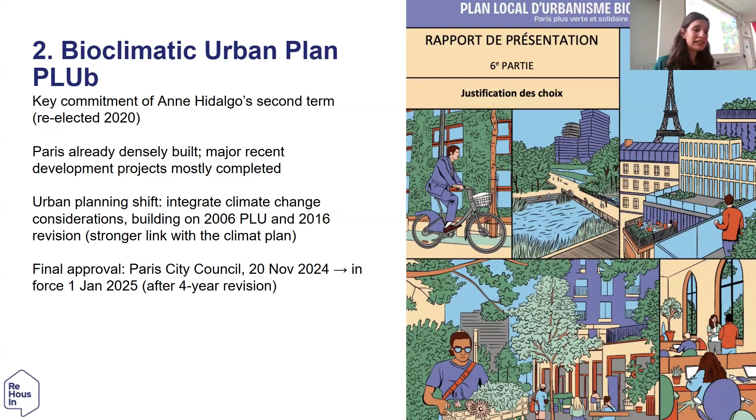What is interesting is the focus of this bioclimatic plan. There are many aspects, but what we are focusing on here is the existing environment and how we can adapt the existing built environment to climate change. So how to do that? The bioclimatic urban plan requires the integration of energy saving measures every time works on existing buildings are carried out.

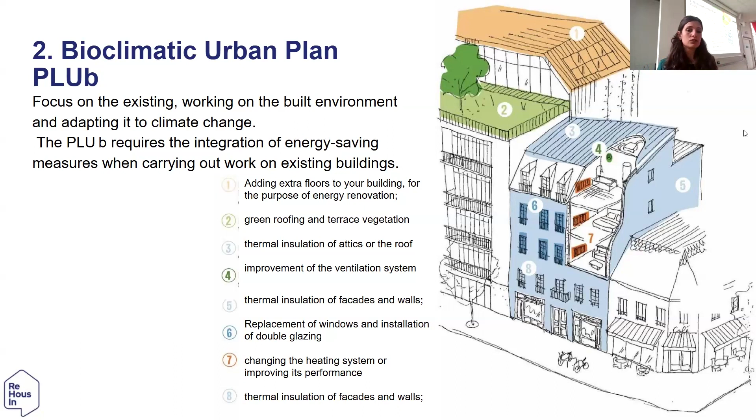So just to go to housing retrofitting and then move forward to the case studies we're going to focus on. In Paris, more than half of main homes, so first residences, are in the least energy efficient categories, which is much higher compared to the regional and national averages. Most of these inefficient homes are private, about 58%, and they tend to be concentrated in central and northeastern neighborhoods.

In 2021, a national law started gradually banning the rental of the least energy efficient homes. Since then, the rental market, both private and social, has been under increasing pressure, even if some exceptions are allowed under this law. Finally, we should also focus on some households that might be more vulnerable compared to others in the city. In fact, small-scale owners in northern districts, such as the 19th or the 18th, face high retrofit costs compared to their incomes.

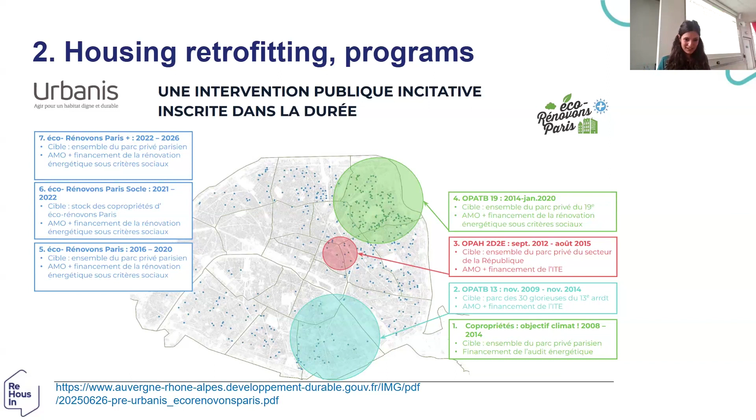So after having given you some insights about the context, housing policies, and greening and housing retrofitting policies in Paris, we can now move forward to the specific case studies, and I will let Antoine present it. Thanks, Federica. I can take it from now on.

So that was already, I guess, a lot for you to get your hands on, and perhaps it was also a bit abstract because you're no expert in housing issues or retrofitting, which might be a bit technical. But I hope that you have already got some idea of the social issues which are at play. If I were to sum up the social issues we're dealing with, it's basically that, yes, there is a need to have greener cities, but who's going to be able to live in these cities? This is the core question we're looking at in this research and in these lectures.

Who decides who lives in greener cities, and who can access greener housing? Because housing retrofit costs a lot of money, since we have to upgrade the building envelope, technicalities, systems, and so on. And so some landlords might be tempted to say, hey, I've invested in housing to have some rents every month in my pocket. So, okay, I can invest, so the living conditions for the renters are better, but I also need to recoup my investment. So why wouldn't I increase the rents?

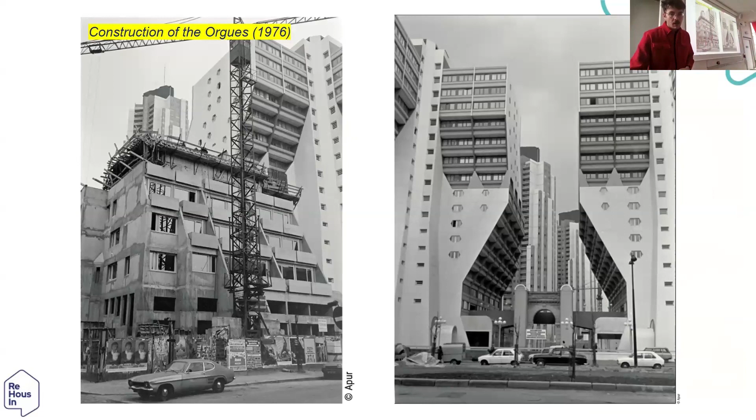As a result, there are very pressing environmental issues because building density is a major factor of urban heat islands. What are urban heat islands? It's basically the idea that during the day, the built environment sucks up the heat and then gives back the heat during the night, so that although the night air might be cooler, it's not really, because then it gives you back the heat, and I'm sure that you've experienced that yourself, probably.

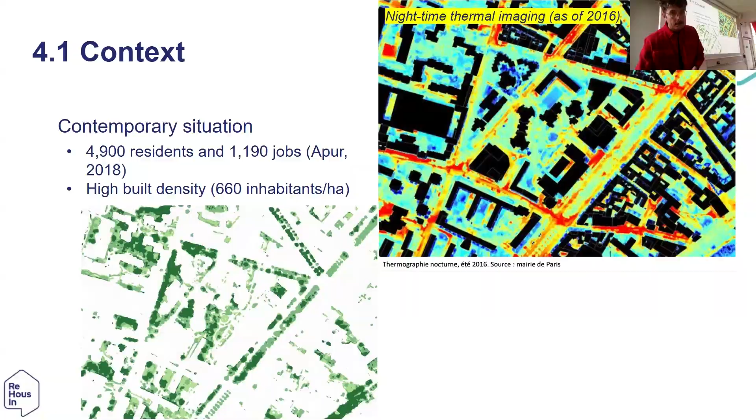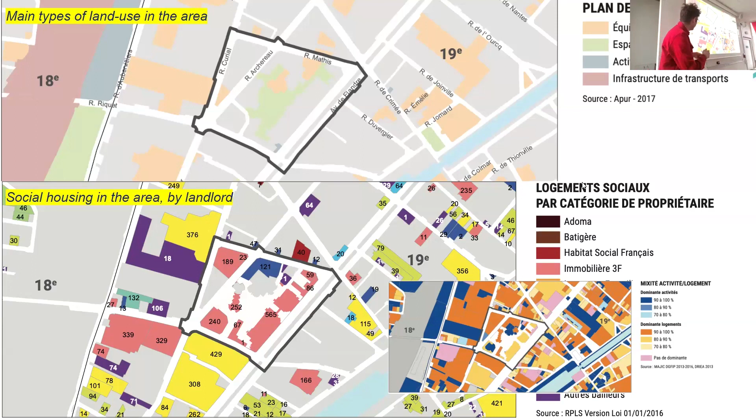This is also an area (the map shouldn't be here, but whatever) that is characterized, as you can see, by a very important presence of social housing. So all of these color blocks are social housing. The 19th district is one of the districts in Paris with the highest share of social housing. And we'll bear in mind, of course, that this is social housing, but then we need to think about what kind of social housing.

This is also an area, if we look at some of the issues, that is facing very pressing social issues. First, there is the phenomenon of population aging. It's an area where a lot of the residents, more than a third, have lived there for two decades, which implicitly means that there may be some turnover in the population due to mortality.

Second of all, there are a lot of economic difficulties. If we take a number of indicators, the neighborhood doesn't fare very well compared to the 19th district or to Paris as a whole. For example, its poverty level is above that of the district or of Paris. That's the same for unemployment. Here you can see the increase in the number of job seekers. There's been some wage growth, but less than in the district and in Paris. So again, very pressing social issues, with a part of the population experiencing dire living conditions.

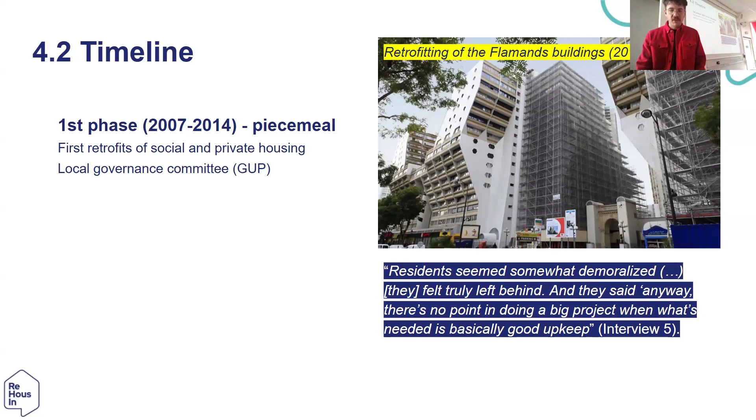They felt truly left behind, and they say, anyway, there is no point in doing a big project when what's needed is basically good upkeep. So the mood by that time was that first we need to fix the basic things, and then maybe we will do something bigger. This came during a second phase, during which the city basically got some money from the state and engaged in designing a master plan, which basically laid out different major orientations for the complex.

To sum up, they did a lot of things, but the major decisions were that they basically should try to open up the complex because it was seen by some residents, but also by different actors who participated in the workshops, such as the police and the planners, as too closed. So they needed to open it and to make it more attractive to passersby and to residents of the neighborhood. And this is how they justified the demolition of 12 housing units here to make this sort of walking path, to make the area more welcoming.

As they say, they did other things. They wanted to enlarge the existing garden, to redesign the garden. So I think the garden is now twice as big as it was before. And they also paid some attention to closure, what we call résidentialisation. So basically, around all the social housing blocks, they agreed with the social housing providers that they should gate the buildings to improve safety and to make people feel more committed.

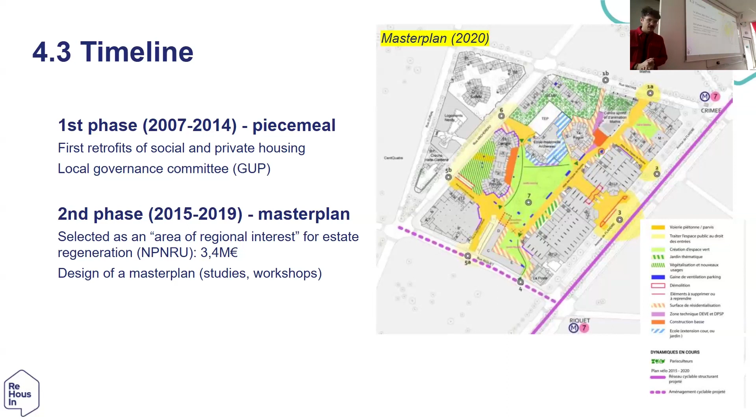And the idea is that if you transform social housing and you make it look like private housing by gating it, you're going to fix safety and you're going to fix, for example, cleanliness. So that remains to be seen. You have a lot of literature on that, which is critical, but that was the idea at least.

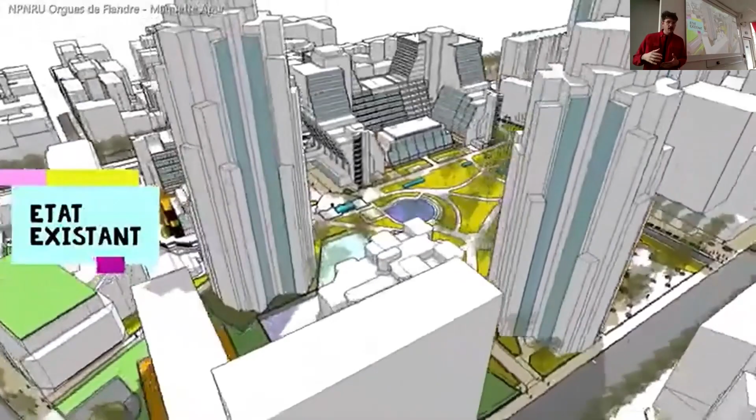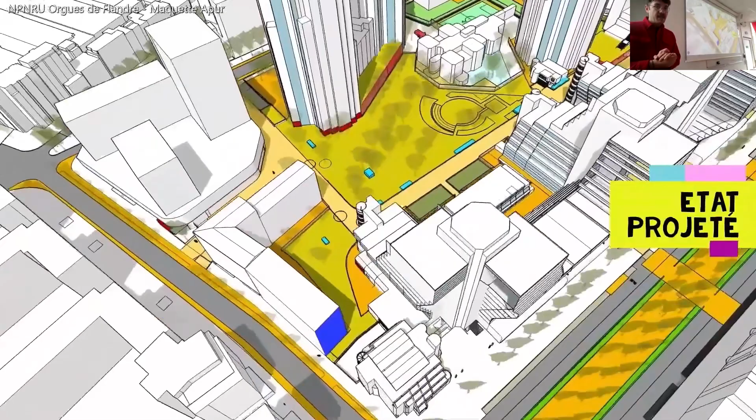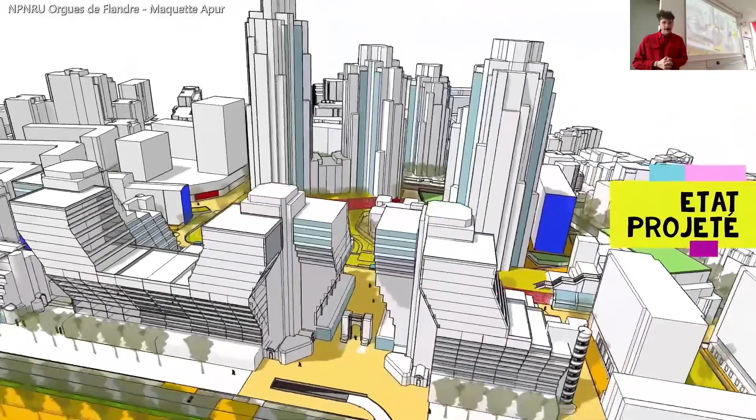That's just a small video that the planning agency made. They were very proud of it, showing you how it was and how it will be, although it remains a bit abstract, I guess. But that's a three-dimensional view. And here you can see the garden in the middle that they have enlarged. In orange, you can see the gates around the social housing. So there is a school with the arrow. They basically turned the entrance. Anyway, that's just to give you a sense.

There was then a third phase during which they made adjustments to the master plan. They did new workshops with residents, for example, on public space. What did they want for public space? What did they want as public facilities? What were their priorities? They also tried to address the issues for women navigating public space. So, for example, they've done walking tours with women residents by nighttime to try to integrate gender-based issues.

And the City of Paris has also signed an agreement with the main social housing provider, which is Immobilière 3F, I3F, which is basically a private social housing provider. And when I say private, it means that it has a private status. It can make profit, but this profit is limited. The ability of the social housing provider to distribute dividends to its shareholders is capped. It's like 3 to 4% per year. So that's a, let's say, limited lucrative social housing provider. Meanwhile, there has also been some progress on the actual works of implementing energy retrofit in social and private housing.

So now that we've seen the context, now that we've seen the major phases, we have a better sense of where we are, of when things have happened. We can also look at what are the main targets and who is going to implement that. It's very important also when we talk about governance to get a good sense of actors mapping. So if we go back to the official documentation, the main objectives of the project as laid out by the City of Paris are twofold.

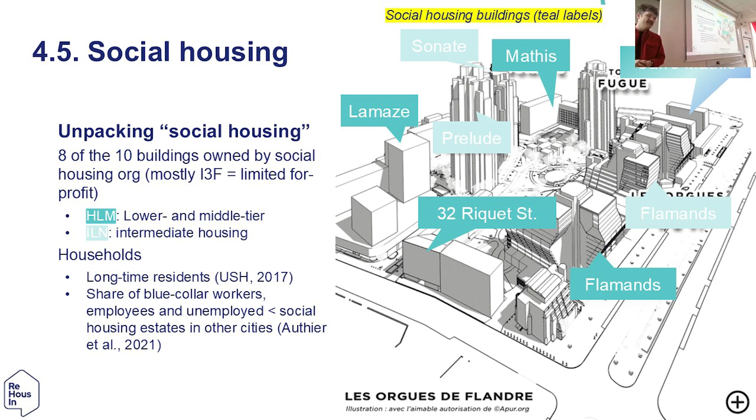I'm not going to enter into the details, I'm going to just jump onto some of the conclusions, just saying that for social housing providers, this is a very pressing issue due to the legislation of 2021 that Federica pointed to, which will, by 2034, impose a ban on the E-label apartments. So if you have an E-label, meaning that basically you have a poor energy performance apartment, as a social housing provider, you cannot rent it anymore. So that means a big loss of revenues. And basically, if one apartment is like this, probably the whole building is like this. So, if we look at the Orgues, almost half of the estates are in this situation. So that was a very pressing issue that was anticipated by some of the landlords like I3F.

The city of Paris, again, provided key support. They put a lot of subsidies into this, almost half of the total cost. They've also negotiated additional contribution from the state agency. And they also underwrote loans, because in order to make the investment, social housing providers are contracting long-term loans.